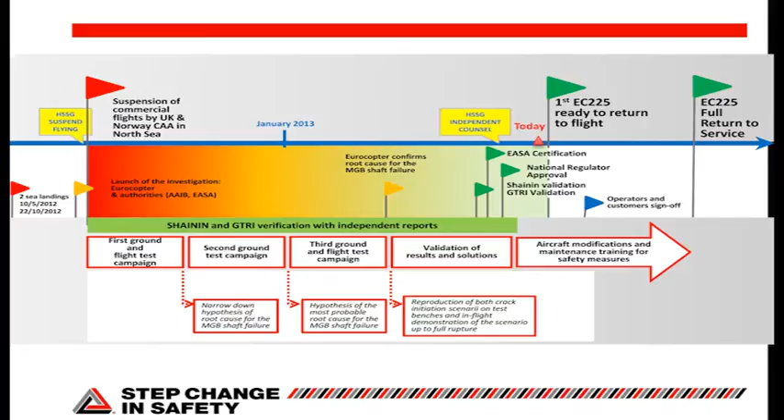So there is no ceremonial big lift going to happen at Aberdeen Airport. It's not going to be like the Red Arrows. This will come back as and when we do the logistics, the retraining, etc. So that's kind of the background.

There's been a huge amount of alignment and commitment to doing things right, not time-driven, not money-driven, but entirely right based on a gate management process and project management process. So we don't go to the next stage of the process until all the questions and assurances have been resolved at the earlier stage. So standard project management stuff for industry, so there has been no time pressure.

So when we see dates like we'll return to service in May or June or July, that has never been a pressure that HSSG or anybody else has felt. It has always been about we'll go when we're ready and not before. So the other thing is that cost has never been a driver. At no point has anybody mentioned cost or production being a particular concern in this. Safety's been the only concern for HSSG. It's the only thing we're interested in. We're entirely independent and have no commercial model in this.

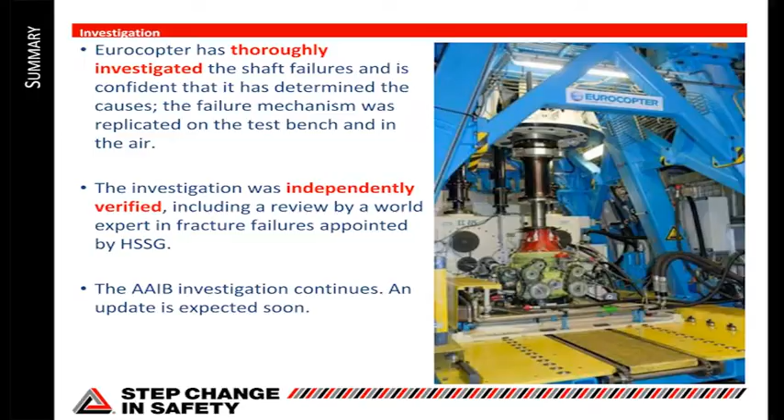So I'm just going to go through a brief summary and then I'll hand over to Tim who will go in detail through the investigation and the findings and the solution. So the first thing is that Eurocopter has thoroughly investigated the shaft failures. And as the previous slide showed, that process took a long time.

And that was necessary because we were off to a false start, if you will, with the first incident, thought we got to the bottom of the problem, then another one happens and it was slightly different. So kind of back to the drawing board and figure out what's really going on. So I want to try and get across to you a sense of the thoroughness with which this was actually done over many months.

So there really is a lot of understanding been developed about what happened, what the causes are. And because that was a long process and everybody's got a clamour for wanting to know what's going on, and you haven't got to all the answers yet and it's complicated, and Tim will go into this, it means that, right, we don't know exactly what the causes are to start with, so you come up with things like probable cause and so on, which can make folks feel, well, they don't really know what's going on. And that's a consequence of that big, long, drawn-out time.

So, I just want to get across to you that this was done in incredible depth and detail to really get to the bottom of it. And then the mechanism of the failures was actually replicated. Okay, so you've got, this is the cause, then you demonstrate, you replicate what happened. So actually, we'll come on to it, what the causes are. It's the combination of corrosion and stress, fatigue, and that was replicated on the test bench, and then a shaft was put up in the aircraft, and the failure mechanism leading to the shaft unzipping was demonstrated. So there is a very high level of confidence that this is what the causes actually are.

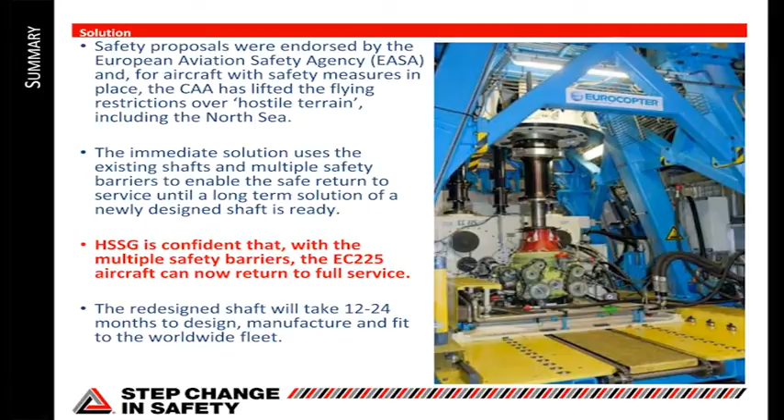So the safety proposals were endorsed by the EASA, which is the European governing body for the aircraft, basically flying certificate of fitness. And so that's the European regulator. So they've gone through all of the proposals we're going to talk about in a minute with a fine-tooth comb. And over and above that, the CAA, the Civil Aviation Authority, which is the authority that governs the flying of commercial aircraft in the UK, has also gone through the findings and has accepted the recommendations, and subject to them all being implemented in the aircraft, has lifted the ban on flying over what they call hostile terrain, so flying over the North Sea, where if the aircraft were to go into the water, it'd be difficult to recover. So the regulators are behind this.

Now, there are two solutions, an interim or an immediate solution, which is to fly with the existing shafts, and a long-term solution, which is a redesign of the shaft. Now, with the existing shaft, there are a number of different safety barriers and additional checks that will be carried out and changes made that allow the aircraft to fly safely with the existing shaft. And we are convinced that it is safe to do that on the basis of the investigations that have been done and the independent verification and the approval of the regulators.

The long-term solution is to redesign the shaft, because using the existing shaft imposes additional actions that you wouldn't want to do indefinitely. So it imposes additional maintenance and so on and so forth. So the long-term solution is a redesigned shaft, but the existing shaft is perfectly safe to fly this aircraft, HSSG believes, with these additional safety barriers, and we'll be coming on to how they work together shortly.

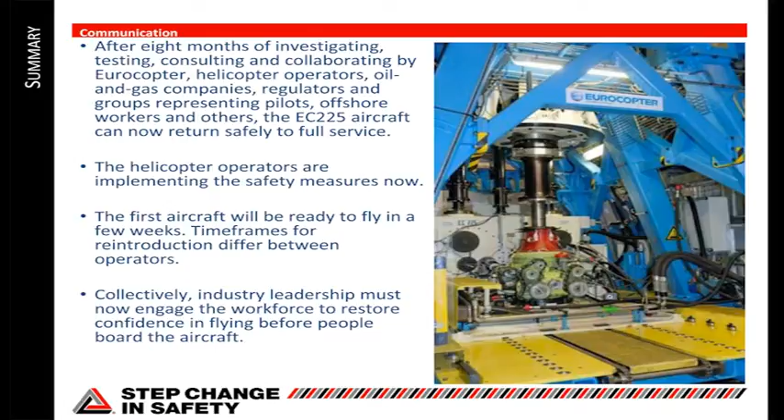Okay, so next piece, absolutely critical now, and our focus now on why everybody's here today is to really tell the story of what's happened, because not everybody's on the same page and has seen what has happened and understands what's been going on. So this is a really, really important thing. Understandably, confidence in flying these aircraft has taken a big dent. And so we need to get our confidence across to you. So the focus is now on exactly that. How come it's safe to put this aircraft back into service?

In terms of the interim or immediate safety measures to resume flying with existing shafts, the modifications to be able to do that and to retrain the pilots in this aircraft, who haven't used it since October last year and so on, they're all being implemented now. And the timelines of those are different, depending on the situation, whether or not people immediately need the aircraft, what the operator's customers are looking for. But the first aircraft may come into service in the next couple of weeks.

So collectively now, our task, and industry's task, is to communicate what's been going on. So there's a big exercise here over the coming weeks and months in communicating, so that people aren't going to go offshore and go on one of these helicopters without having a good understanding of what's been done and having confidence restored in the aircraft. So that's really why we're here today. So with that, I'm going to hand over now to Tim Glasspool, my co-chair from Bristow, who's going to talk about the investigation and the solutions.

Good morning, everybody. As Alan said, I'm Tim Glasspool. I'm Head of Flight Operations with Bristow Helicopters. I'm a 225 pilot. I'm not current at the moment because the aircraft has been grounded, but I'm booked in for training shortly, so I'm looking forward to flying it again. So I'm just going to take you through some of the main points of the investigation, root causes, and the beginnings of the barriers we're putting in place to make the aircraft safe to fly, and then that's going to be carried on with Les later on.

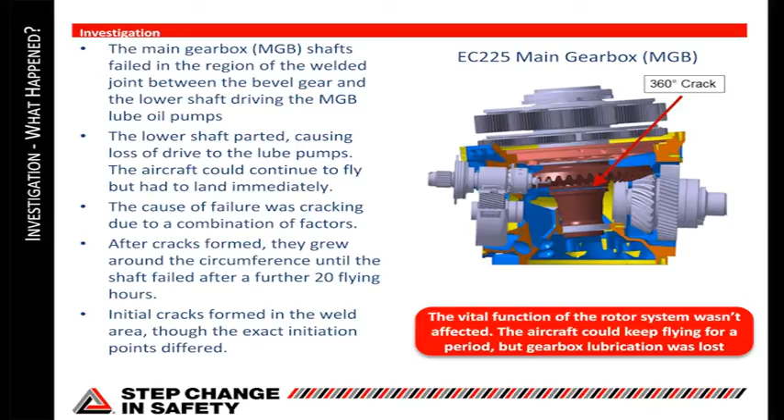So first of all, just to talk about the main gearbox, that's a nice coloured representation of it. Obviously they don't look like that in real life, they're pretty much grey and black. But the power in from the engines comes in from this side. This is the main bevel gear which drives the drive shaft up to the rotors, which are up here. And the power really comes through here, through the bevel gear and up. The weld, which is here, is to hold this bottom part of this bevel shaft on, which drives nothing but the two oil lubrication pumps.

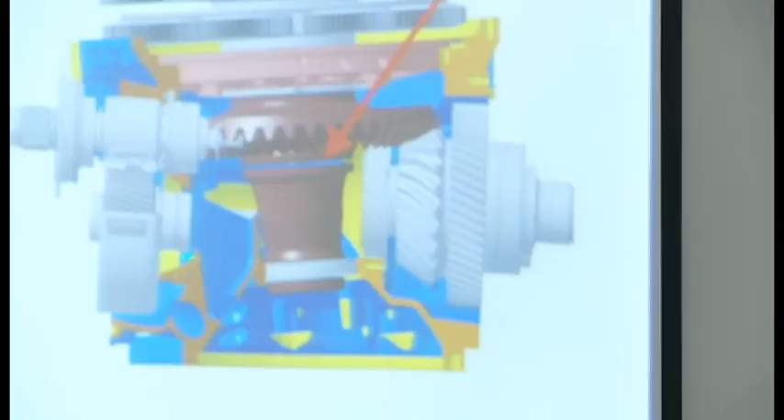Now, one of the reasons that both the oil lubrication pumps are inside the gearbox and both on the same drive shaft is a regulatory requirement that all of the oil system needs to be contained within the gearbox, or as much as possible. So that's why they're both in the same place. It's a regulatory requirement. So that's really where the power goes, it's up. And this is really just driving two relatively small pumps.

This is the weld. The reason there's a weld is you can't actually manufacture the piece in one whole unit. You can't actually machine the bevel gear with this piece in the way, so it has to be welded, and this type of weld is in pretty much every gearbox on every helicopter. So that's why there's a weld, and this was the area that failed around here.

The main point about the power going through and up is the fact that even with this bit removed, if it's cracked all the way around and fallen off, it doesn't actually affect drive to the rotors. So there's not an immediate issue other than the fact that the lubrication pumps aren't being driven, so the oil flow around the gearbox stops. But of course there's still a lot of oil on all the gears, which is why it continues running quite happily for a while. The emergency lubrication system, which was fired because the crew got an indication that the pressure had dropped to zero, fires in at the top and at the bottom, but mostly at the top, and that's what kept the gears lubricated and allowed the aircraft to safely ditch onto the water under full power.

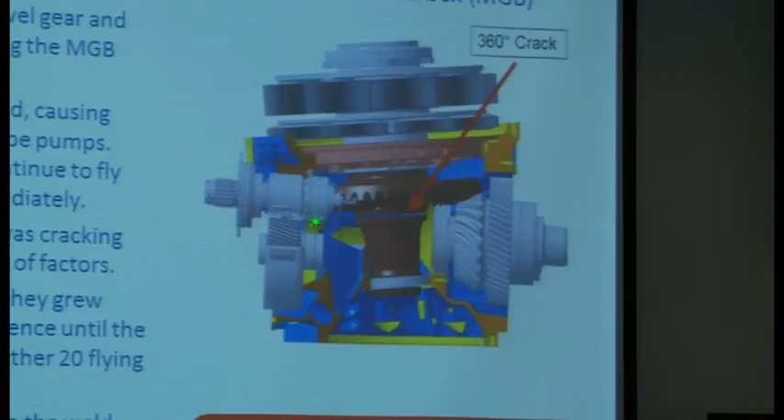So this is the area where it cracked, or where they both cracked. The cause of the failure is a combination of things, which I'll come back to on a later slide, but they are the same root cause, just a slightly different initiating factor. After the cracks formed, they grow all the way around until the shaft fails after about 20 flying hours. So there's quite a lot of opportunity to catch it if you're looking for it. And of course now we're looking for it very hard. The point about this is that, again, it's on another slide, but it spins very, very quickly. So the forces involved are pretty high.

I think that's that one.

So really, just to take you through the beginnings of the investigation, it was an extremely thorough and exhaustive investigation. As Alan pointed out, it took a long time. There was a very thorough investigation for the first ditching, and the cause for that wasn't immediately apparent. It took a lot of work to actually nail it down to moisture, which had been put in via a small plug, which is at the end of the weld, because

the welding technique that's used is electron beam welding, which is a very high strength weld, but it means that at the end of the weld, where it meets itself after 360 degrees, there's some disrupted, disturbed material, and rather than leave that as a potential weak link, it was drilled out and a plastic plug goes in because there's oil that runs inside the shaft. And that was where moisture was induced for the first crack. But again, we'll come back to that in slightly more detail.

But because that was quite a thorough investigation, and it was a fairly obscure cause, which had never really come up anywhere before, it was felt that was the cause. And then of course, when the second one happened, everything was reviewed and looked at again. So it's been an incredibly long investigation. Eurocopter, in their factory in the south of France, set up this war room. You can see all the different charts and things on the wall, which we will go through. We've had an opportunity to visit that as HSSG and see them in action.

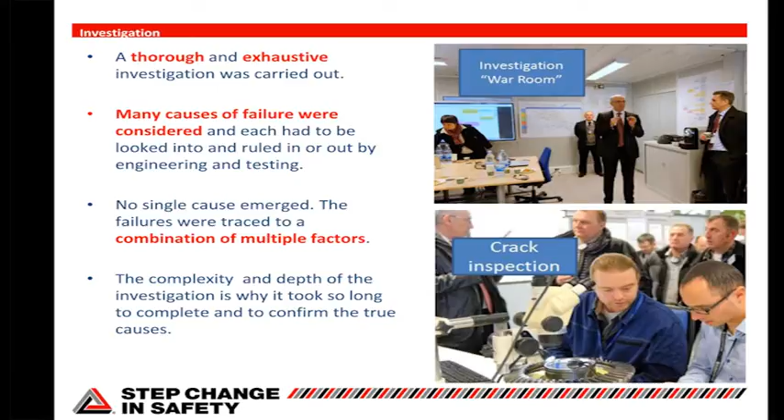So you can see here that the guys are looking at one of the shafts, and under a microscope they're examining the surface of where the crack grew or propagated. And that's a really important point to understand, that it is 20 hours, and so they've been measuring the rates at which it grows very carefully so that it doesn't fail immediately. It's reliably understood that it does not immediately zip, go all the way around and prompt failure. It takes time for it to grow around. So it starts like a little crack, and it grows around.

And then the thoroughness, again, Jake could comment on this. I've been to this room twice, and the exhaustive nature of it, with dozens and dozens of possible things all ruled out and closed out, it certainly impressed me, and the amount of effort that they put into it, incredible. Yeah, I would supplement that. You could tell Alan's an engineer, and he's interested in the cracks. I was more interested in the incident investigation, and I couldn't help but be impressed with what was going on there. I've seen a lot of incident investigations down the years and represented a lot of people accused of failure and everything else, but I've never seen anything on that scale.

It was extremely impressive, and as Alan said, we're here to talk about building confidence, and seeing that instilled a great deal of confidence in me, because to see the depth to which they were going, I've never seen so many yellow stickers in one room. It was incredible as they chased the things all the way around the room through the different stages. Really impressive. The crack stuff, for me, is a wee bit over my head, but now that I've seen Burdekin's report, I've got a better grasp of that as well, and you'll hear more about that as we go on.

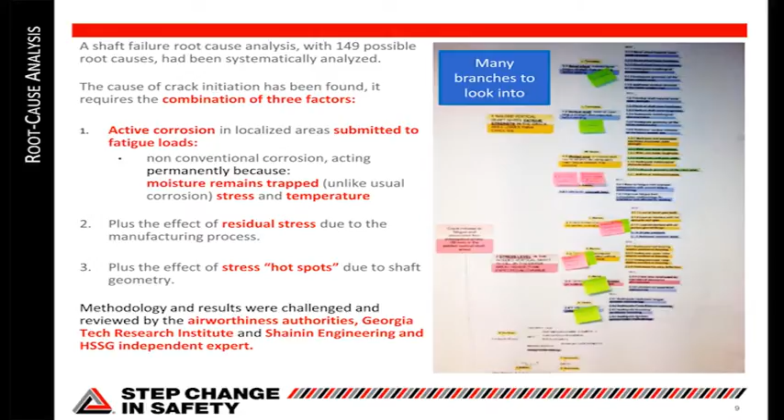So again, just working through the root cause analysis. It built up into 149 possible root causes, each of which is like one of these, and then there's all the sub-roots off of all the different branches off of that. So there's a huge amount of investigation done. Every single one of these points had to be chased down to confirm that it either was a factor or wasn't a factor, and why it was or wasn't. So there was a massive amount of work done in all of this.

And eventually it was narrowed down, and the cause of the crack initiation was found. And it's a combination of 3 factors. So you need active corrosion, which is a non-conventional corrosion. It's a new term, which requires the presence of water, of moisture, and stress and temperature. So it's those three things together for the active corrosion part of it.

You also have some residual stress, which wasn't fully understood at the time, within the weld itself. The process of welding it, actually, you have some stress remaining in the part when it all cools down. And plus, the actual geometry of the part as designed had some stress concentrators, some hotspots in it as well. And you put any one of those things individually, the safety factors were hundreds of percent. It was never an issue. It's only when you combine all these things together that you're actually able to initiate a crack and break a shaft.

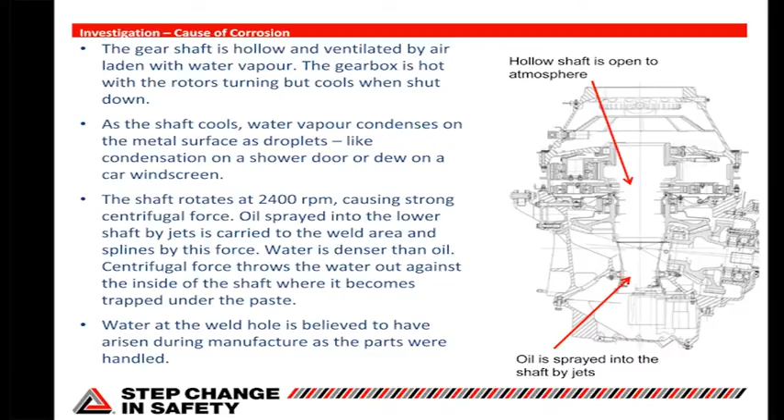So you might think, how can you get any form of corrosion at all inside a gearbox, which is full of oil and gears all thrashing about and splashing oil all over the place? Well, the only place there isn't very much oil is in the middle of this shaft, which is hollow and open to the air at the top, which is a pressurization thing. It could be sealed, but it would be a difficult thing to do, and there's never really been a need. It's not normally a sealed part. So this inside here is open to the atmosphere.

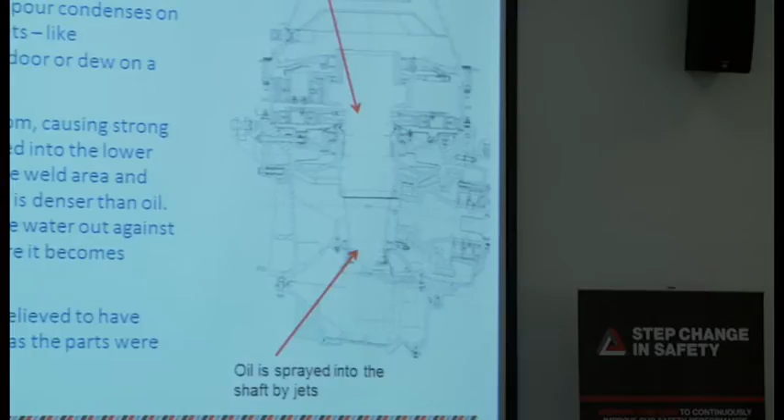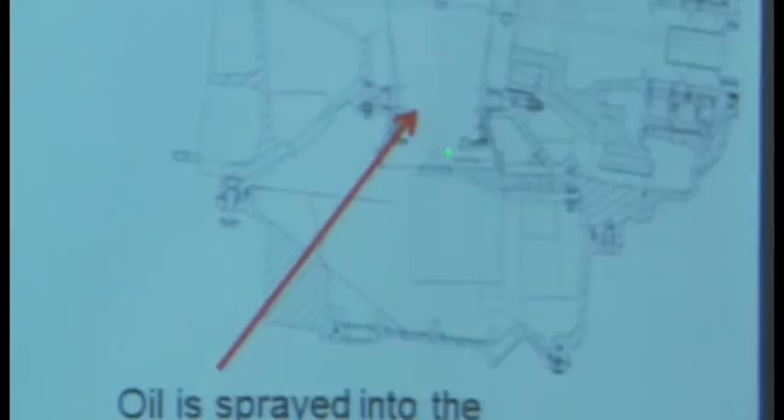Now, the gearbox gets pretty hot when it's in operation. They routinely run about 85, 90 degrees centigrade. And obviously, at the end of flight, they cool down. So you've got a possibility for condensation. So that's potentially where water is getting in. But it doesn't matter if there's nothing to trap it. And at the same time, there's oil being sprayed up from the bottom because there's some gear splines within the shaft to lubricate. And what became apparent was the oil being sprayed up here wasn't man enough for the job. It wasn't able to keep the whole part sufficiently covered in oil to keep moisture out. And that's what allowed moisture to be trapped.

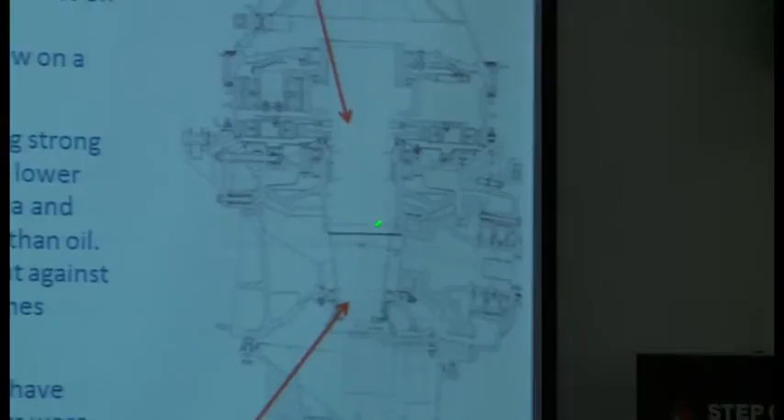As I mentioned before, this shaft rotates pretty quickly. It's not the fastest rotating part in the gearbox, but it's rotating at 2400 RPM, which means that the centrifugal loads inside the shaft are about 400 G. So there's an awful lot of force to press any moisture which is trapped outwards against the surface.

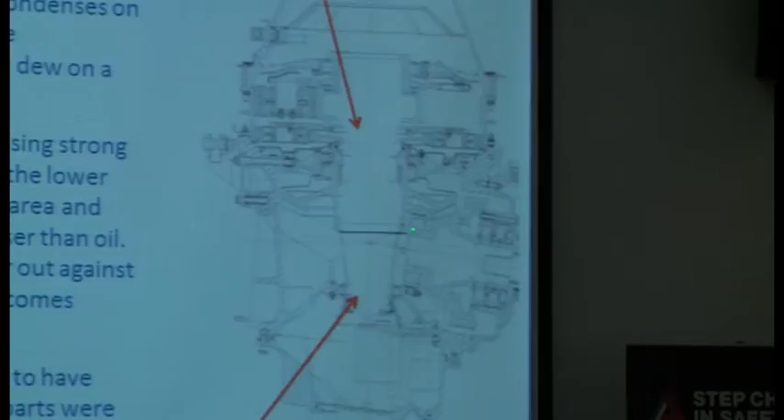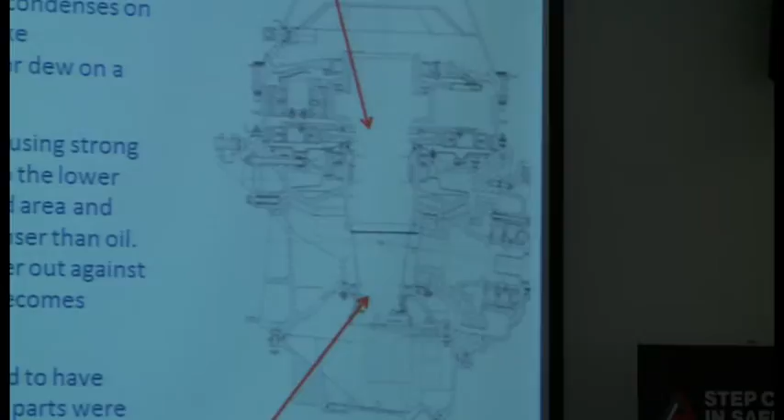And the things that allowed the moisture to be trapped are there's some slight wear on these gear splines in here, creating a sort of metal paste. There's oil in there as well. And you get this slight sludge and paste, and this was trapping the moisture within it. And then there are some slight machinings, some grooves, to do with the weld, which allowed that paste to be pressed up and held in place while the aircraft was in flight or the part was rotating. So this allowed water to be trapped up against the inside surface of the shaft for long periods of time.

And that, together with latent stress in the weld, which isn't in every single gearbox, it was just in a few of them, and the other stress concentrators due to the design and shape of the part at the time, allowed all these things to be added together to allow a crack to develop and then to propagate. But the key factor is, for any of this to happen, you have to have the moisture here and trapped against the part.

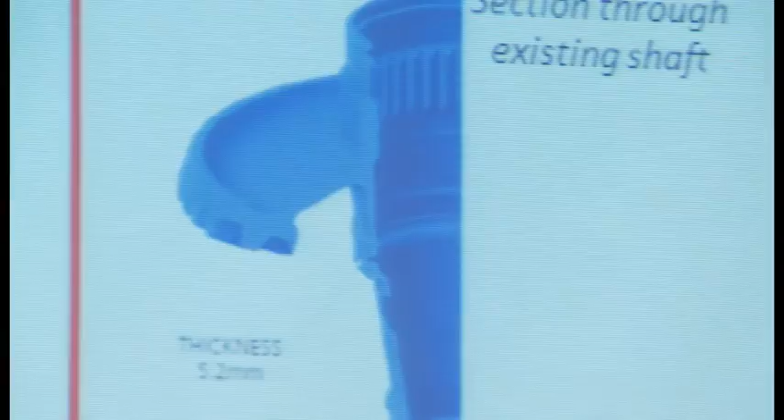Which brings us to the solutions. The immediate solution is fairly obviously to remove the moisture. So what's being done is the oil jet is being added to and redirected as an additional jet to ensure that all of the area down here and up to these gear splines is much more adequately or properly covered in oil. I mean, now it's going to be drenched in oil, so there's no possibility for moisture to remain.

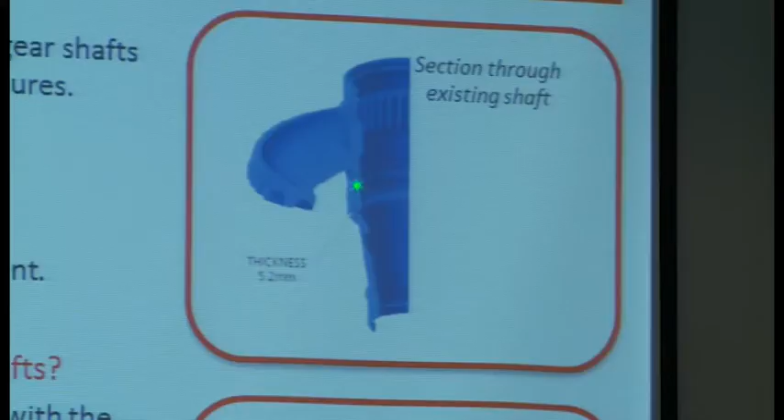And again, that's the biggest hole in the Swiss cheese. Once that's removed, everything else isn't really particularly relevant. So there are other safety measures on top of that, but that's really the key one. And before any kind of return to flight, the interior of all these shafts are all being cleaned.

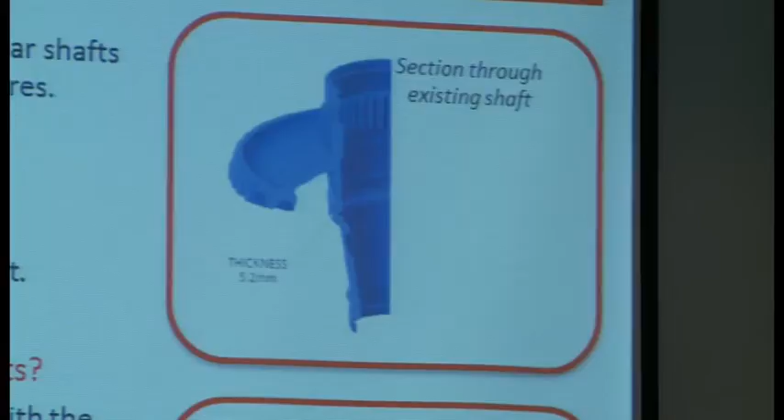To be honest, we've not found very much contamination there. Even having sludge or any of this paste inside the gear shaft is pretty unusual. It wasn't an area that was looked at very closely in the past. It was something that had been looked at every, I think it's every 500 or 600 hours as part of a more major inspection. And even when we've done that, we've not found very much sludge there. And now that we've cleaned them all, we didn't have to clean very much off. There wasn't very much on any aircraft.

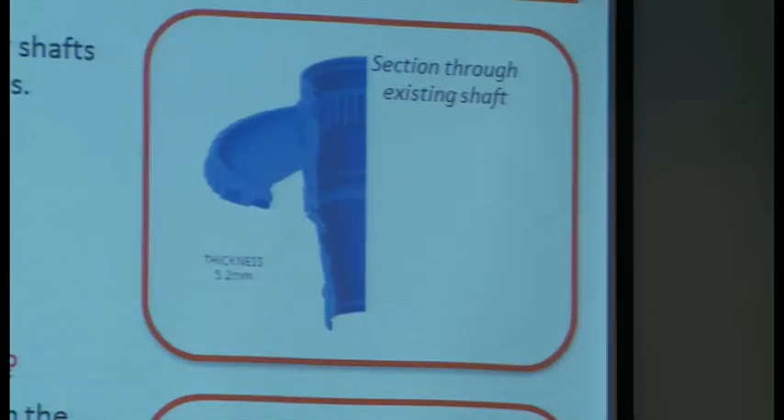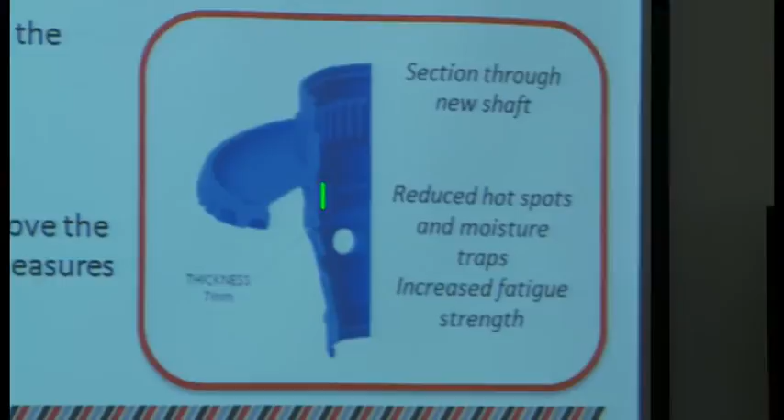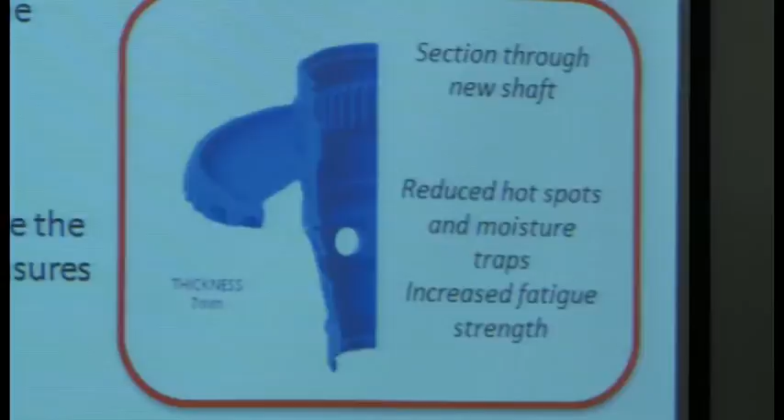So there's a number of unusual events that sort of came together to allow this to happen in the first place. The longer-term solution is a redesigned shaft, which, you don't really see it from this picture actually, but if you see the real shaft, it looks a lot smoother. There are far fewer of these ridges and things to trap moisture when it's spinning really fast. There's increased thickness, so you've got a stronger part, and then you've got some more holes in it to allow greater lubrication through the oil jets that spray through these holes. So that's the longer term solution.

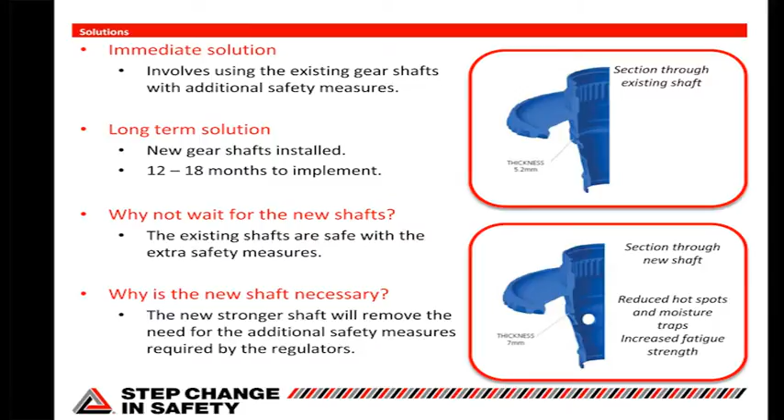And so in the meantime, these are cleaned. They're cleaned on a more regular basis if we need to, and the oil jet has been redirected so that there's a lot more oil washing around inside. And because we understand the cause and we understand the importance of the moisture, that's why the existing shafts are safe with these current safety measures.

So we've fixed the problem, and that's why it's perfectly safe to go flying now and not wait for this shaft, which has yet to go through the full design process, certification, flight testing, and all the other things it'll have to do before it can be fitted to the aircraft.

But this is still worth having, because at the moment we are having to do these additional inspections, and they will no longer be required with this part. So there's an engineering burden on nightly inspections, which will no longer be required once this is in place. So it's still worth having the new part, but in the meantime, we're good to go with what we've got.

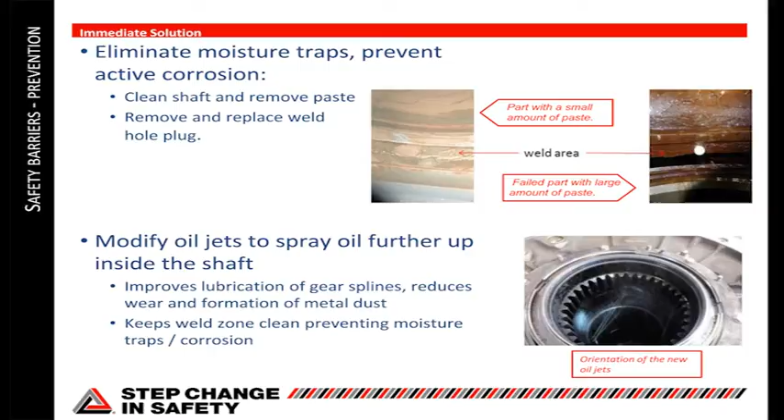So like I say, the key thing is to eliminate the moisture traps to prevent this active corrosion. There's a few pictures here. This was the one that failed due to the paste and the corrosion near the crack. This had a lot of this paste on it. Again, it seems to be relatively unique as to why that aircraft had so much in it. Some aircraft have been found with small amounts, but again, it doesn't seem to be that common.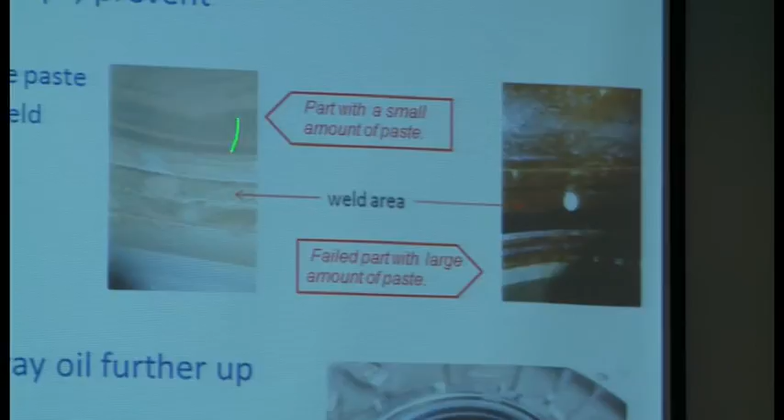But this is now all being cleaned, and these are all now sort of shiny and metallic, and that's how they look. So before we fly, it's clean the shaft and remove any paste if there is any.

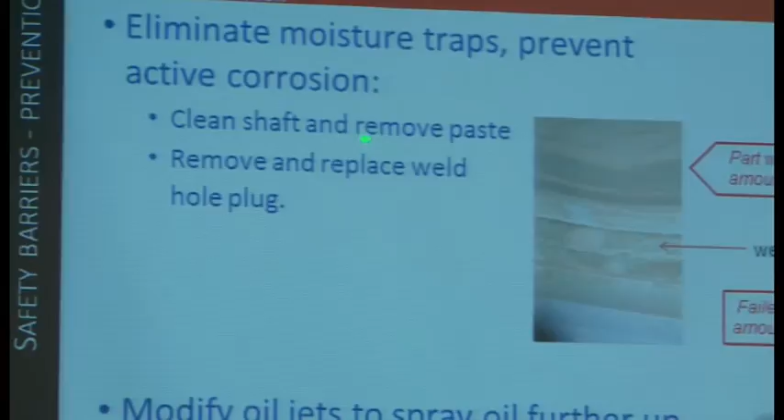And the first pitting was caused by moisture trapped in this hole and the plastic plug, which is believed to be potentially even just sweat from the guy that actually fitted it. But because the shape of the plastic part and the shape of the hole weren't quite the same, that was very neatly sealed in and trapped.

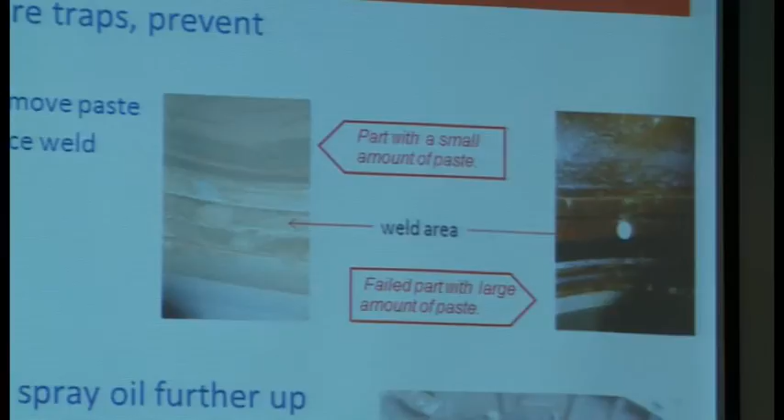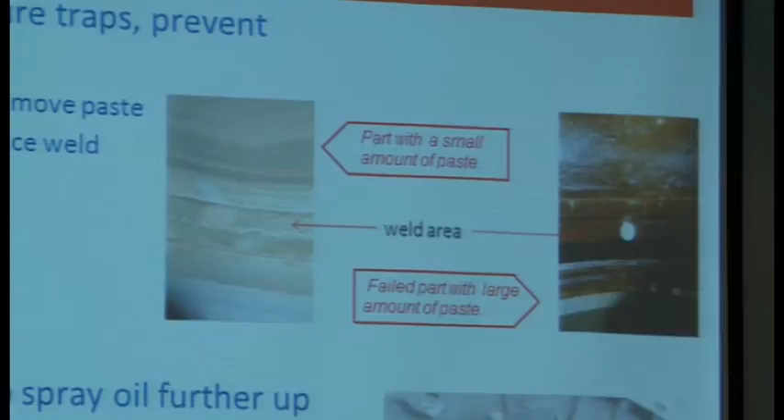And it had exactly the same idea in that the water was pressed against the part. And again, it's in the same part of the weld, so you had the potential for, you know, the latent stress was in that particular weld. And these things came together to allow the crack to initiate and then develop.

So first of all, you eliminate the moisture traps and get rid of the possibility of water being trapped there through paste that's already in place. Then the oil jets that spray inside, you can just see the spraying through one of the holes here, have been redesigned, and new parts are being fitted to allow the oil spray to be much more dynamic and also to cover a much bigger area.

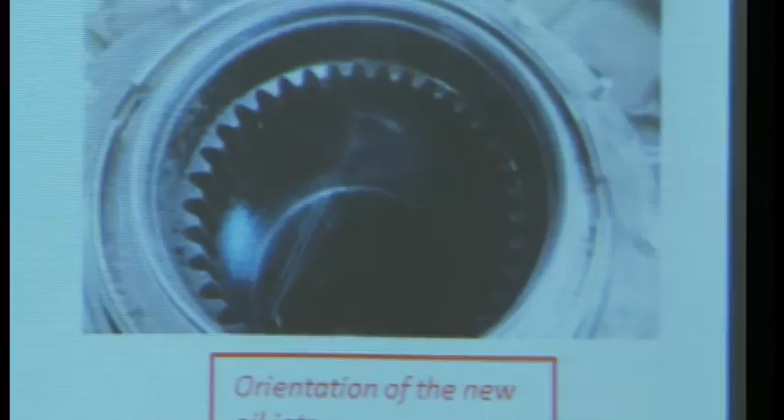So this whole area is now drenched in oil, whereas before it was apparent that the oil coverage wasn't that good. So it has another effect of improving the lubrication of these gear splines, which of course reduces the amount of potential paste or sludge that gets produced as well. So it's kind of a double whammy having this improved oil jet. And it also keeps the whole weld zone clean and prevents any moisture from getting in or being trapped.

In addition, once we do start flying, and in fact we've done this already, all the shafts have been inspected. A very clever ultrasonic inspection system has been developed by Eurocopter. It's specifically tuned for this region of the aircraft, so it's been specifically developed purely to look for cracks in this part of the gearbox.

So the shape of the tool fits into the side of the gearbox. We have to remove one or two pipes on either side. So you put a camera in one side, and then the actual tool itself fits in the other side. It's shaped and designed so that it can only really go in one place. It clamps onto the shaft, and then you rotate the shaft, and you can do a full 360 inspection of that bevel, the weld area of the shaft.

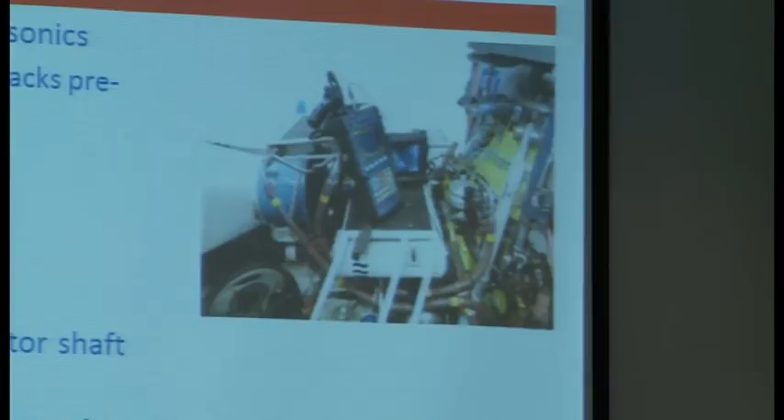So the frequency is tuned so that it matches the size of the part, so it's as accurate as it can possibly be. The guys routinely in the testing phase have been able to pick up cracks as small as 2 millimeters. So it's a very accurate and relatively easy to do inspection.

So it ensures early detection of very small cracks pre-flight, and the inspection regime is either every 8 flight hours if you're flying the aircraft at full power, which is what we all intend to do, or it's 11.5 flight hours if you fly at reduced power. There's not too much benefit to that, to be honest, because you're flying the aircraft more slowly, so you actually end up doing virtually the same number of flights, whether you fly it slowly and inspect every 11.5 hours, or fly it at normal speeds and inspect every 8 hours. So they're effectively the same thing.

8 flight hours is effectively daily, so the aircraft will be inspected pretty much every night, unless they've not done any flying. These analyzers record what's been done, so the data that's been collected can be emailed to Eurocopter, or any remote sites around the world can get cross-check and verification of anything that's been seen. And we have to keep complete records of all the aircraft and all the checks.

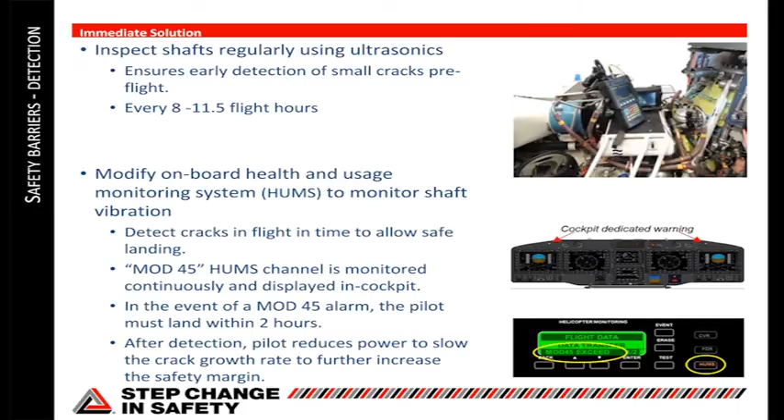And there's one channel which is called Mod 45, because the bevel gear has actually got 45 teeth on it, so that's the channel that we're really looking at. And the vibration spectrum of that changes once the crack has got to about 40% of the way round. So at that point, and to put it in perspective, the shafts actually fail when the crack gets 90% of the way round. So there's still a lot of time when the in-flight HUMS system will pick it up before the shaft would actually break.

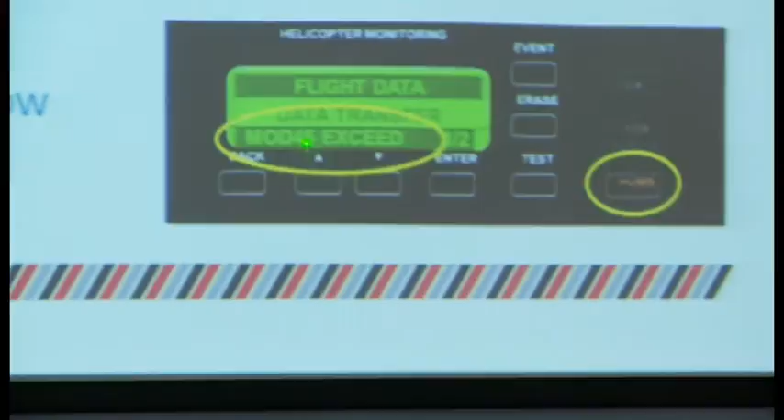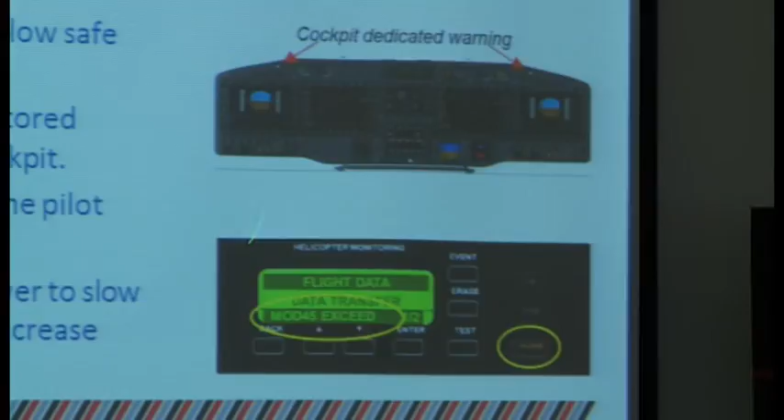And what we get is there's dedicated warning lights fitted to the flight console in front of each pilot. You can see they're quite prominent, right in your eye line, which will make you look down to this panel, which is the HUMS panel, and on there we get the various different warnings. There's various different things that can happen because the system itself can fail. We can get no data from that particular part of HUMS, which again will be alerted to the pilots, or if there's actually a crack detected, we'll get this Mod 45 exceed.

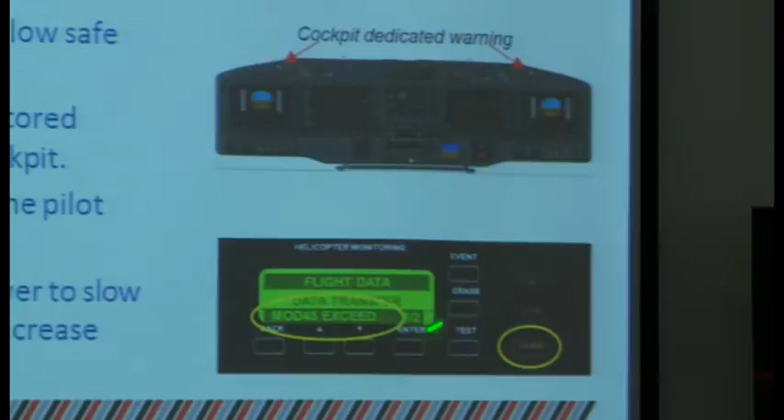So the vibration, if this was a graph, the vibration will slowly increase. The red line where it triggers is right down here, and the point where it fails is right up here. So the trigger point is very low. So if that trigger point gets exceeded, because this part's starting to vibrate now more than it should be, it brings on the lights, the crews will see what they've got, and at that point, we've got 2 hours to land.

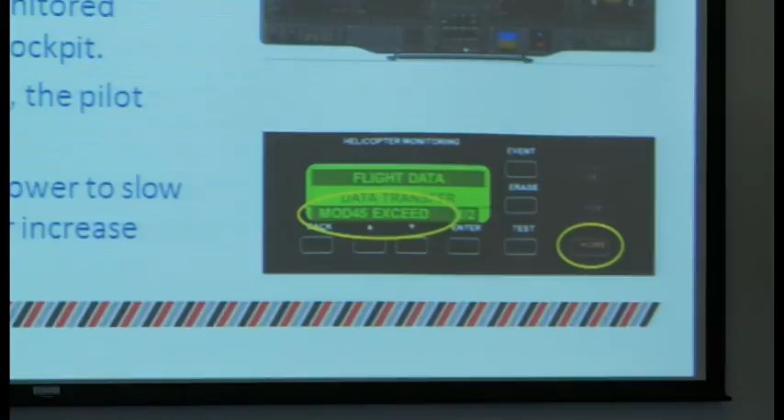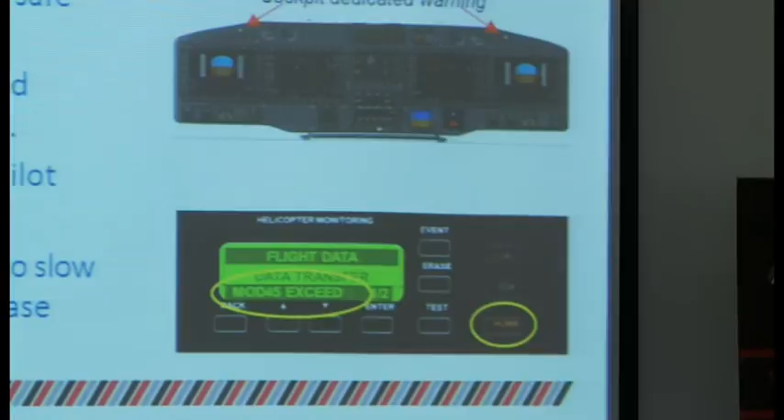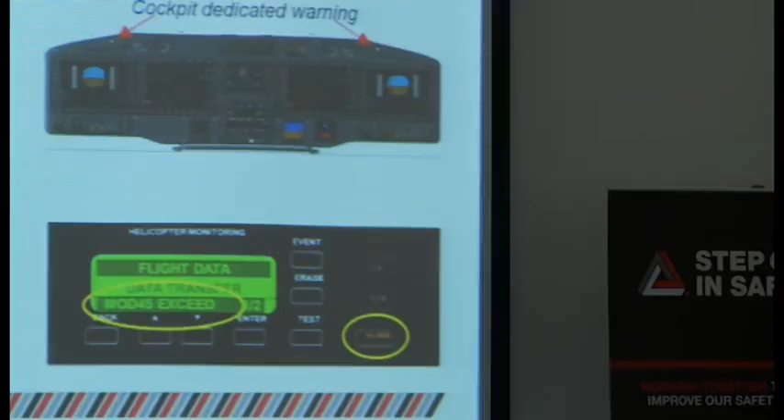Now, we've actually got nearly 4 flight hours before you would expect the part to fail. But with the usual aviation margins of safety, we're not allowing 4 flight hours, it's 2 flight hours. And in addition, the crew will be reducing power. So you reduce power to reduce the stress through this now cracked part, and you must land within 2 hours. So there's no ditching, there's no emergency as such.

You've got 2 hours to fly back to a maintenance base, and there's not many places, to be honest, that aren't within 2 hours of either Aberdeen or Sumburgh or Scatsta. And one of the things we're looking at is that we won't be flying to those places that are. So we can rely on the fact that the crew will be able to fly back to a maintenance base.

And that's it. So if it does happen, if all of these other barriers have failed, for whatever reason, it's incredibly unlikely. And even if you actually get to this point, the aircraft will be recovered back to a maintenance base safely, and then will be inspected to see if it's a real alarm or a false alarm.

Oh, and that's now to Les for his Swiss cheese model. Thank you.

So I'm not entirely sure why this is my Swiss cheese model, but I think there's been an awful lot of technical data, and I'm a bit like Jake, I like things nice and simple. I like to be able to understand it, and I actually also want to be able to tell you what's different this time, because that's actually the question: why is it safe to fly now in August 2013? Because it was safe to fly in May 2012. What's the difference? So the Swiss cheese model will hopefully help us do that.

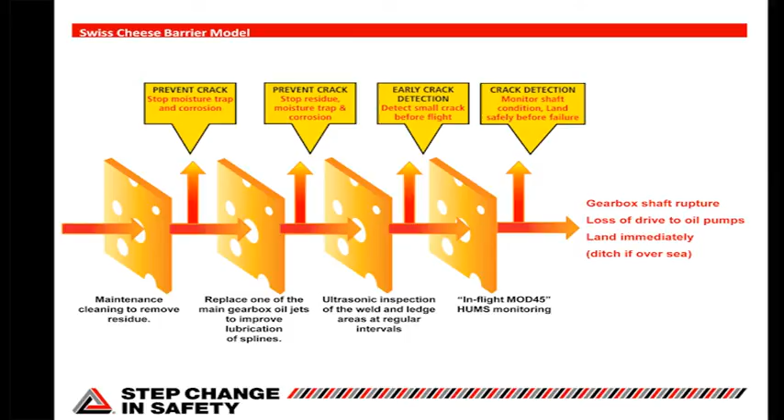So in the event that the first 2 fail, which is almost entirely unlikely, we need early crack detection, and that's what Tim talked about in terms of the non-destructive inspection, the ultrasonics. And that will detect that very, very small 2 to 5 millimeter crack. Much more realistic and better for everybody to detect a crack if it's formed, not likely, but if it's formed, on the ground. You don't want to find it in the air.

If you find it on the ground, we don't return to service. That aircraft, just because there's another 20 hours, doesn't mean this thing's going to take off. And so it will be removed from service immediately at that point. So there's no "we've got another barrier, so let's not worry about it, let's do an operational risk assessment and keep going." No, it's grounded and impounded at that point, and it will be resolved and fixed.

And the final barrier, of course, is the in-flight monitoring. So the in-flight monitoring is a really interesting thing, because in November we had a safety rep meeting, and a safety rep who I think is actually in this room stood up and said, wouldn't it be nice if we could have in-flight monitoring in the 225? And Eurocopter, if I remember rightly, said that's not possible, because it only happens in Airbus 380s, and it's a very new feature and everything else.

So I'm not going to suggest for 1 minute that this is a result of a safety rep challenging Eurocopter. But as a result of engagement, we've got in-flight monitoring of this vibration sensor. And I think it's really, really important that that's been put in. So it gives us that additional barrier. That benefit of engagement, that benefit of challenge, and that benefit of working in this way has helped us have 4 very strong barriers.

Stop it happening in the first place, and you don't have to worry about detecting it. If for whatever reason barriers fail, then we detect it early. If we miss that detection, and we have 2 opportunities, we detect it in flight and land safely. So there's no requirement to ditch. It's fundamentally important that that's the basis on which we're making the decision. Multiple barriers, multiple layers of assurance.

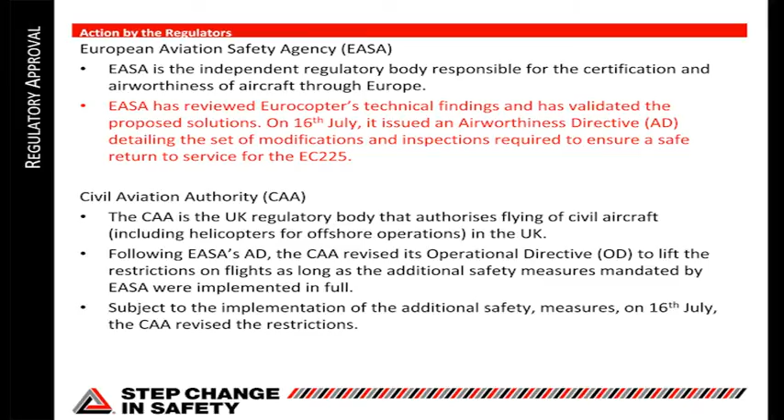And so Tim's going to do this, but I think it's important to understand that, if you look at what we've done in HSSG before, we have had to do things differently this time because we know that May wasn't good enough in that regard from an industry perspective. And what we've done differently is not this page, and Tim can talk about this. Now, this is our standard regulatory process and what each of them do. Alan and Jake will talk about what we've done in addition to next.

So, Tim, can you just run through kind of how the regulatory regime works? Because it's quite different from our normal health and safety regulator. Yeah, it's very different because it's mostly run from Europe. So the European Aviation Safety Agency is responsible for the airworthiness of all aircraft that fly within Europe. So they are actually the authority which has the power, the responsibility for certifying new aircraft and for modifications to current aircraft.

So when Eurocopter approached EASA with all of these proposed modifications, they were the ones that had the task of ensuring that they were all fit for purpose, did the job that they were supposed to do before they actually certified them and published the airworthiness directives. So it's linked with the European Commission, and it is a governmental body, but it is separate from the rest of the EU. It's actually based in Cologne in Germany.

So they are the ones initially with their airworthiness experts because they do this. I mean, Airbus is a major manufacturer of fixed wing. You've got Eurocopter and Agusta-Westland, major manufacturers of helicopters. So there's an awful lot of certification that they have to do. It's nothing new for them. It's something they're used to doing, and they do a thorough job. So it was a very thorough job.

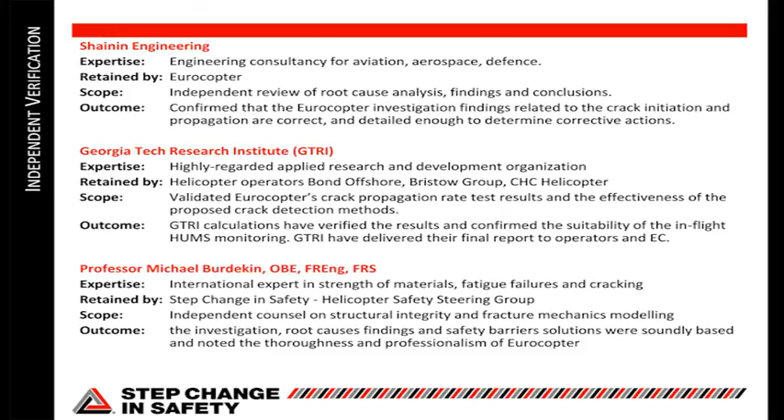And then finally, Professor Burdekin went to UMIST like myself, international expert in the strength of materials. I'm going to invite Jake to say a little bit about the professor, but he basically was brought in to take a look and ensure that the findings were valid.